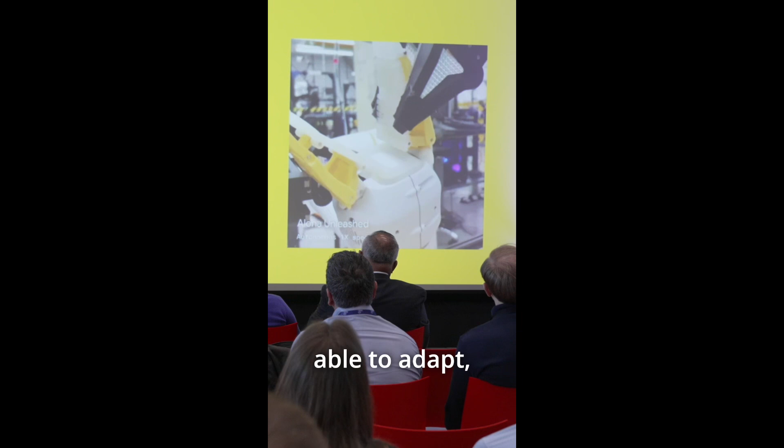And this is actually the moment where I like to announce: AI needs a body, to actually be able to help us humans do things we don't like to do, so we have time to do things we would like to do. So, why is it so important, as I said? We will have robots that will be capable of solving these complex manipulation challenges in the future. They will be able to adapt, but they will also be able to handle things that they have never seen before. So this is what you can expect from the new ones.

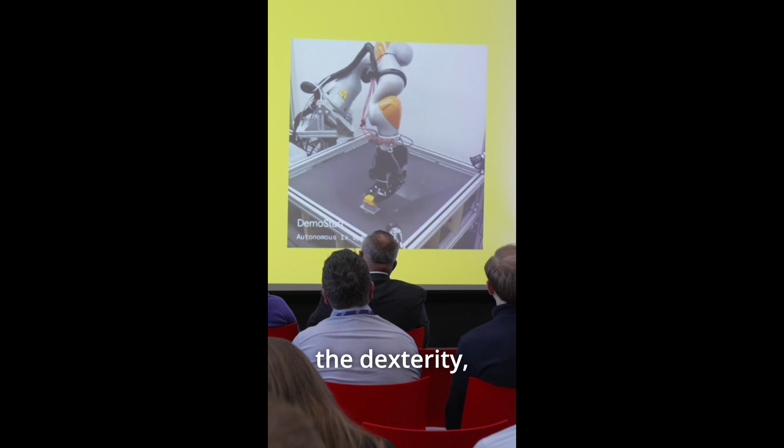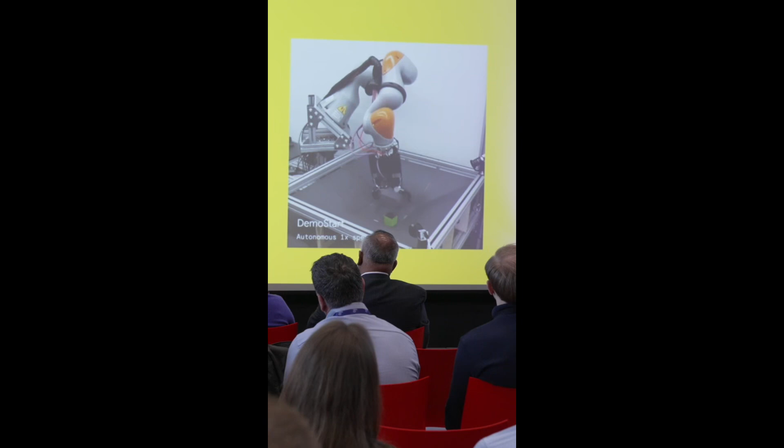So this is the DemoStart, the second one. I told you about the dexterity, how the robot is learning to put different stuff, autonomously, obviously. With the Shadow gripper, yeah. As you can see, we still have a long way to go, but it's a good start.

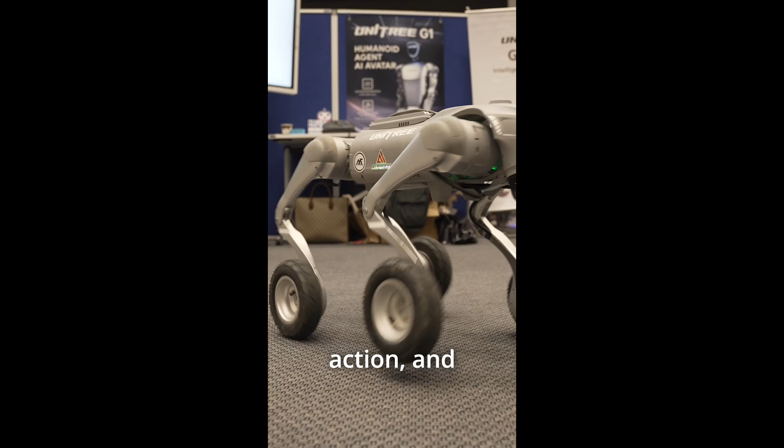I'm very careful in declaring the next industrial revolution, but for the first time in my life, I feel it's worth thinking about announcing that the fifth industrial revolution is coming. Dear participants, to truly step forward to an Industry 5.0, we need a vision that goes beyond a two-year ROI. We need to take action. Humanoids and other deep technologies are not just a tool to improve this or that process. They will be essential components of our future society. The race for physical AI has just begun. Switzerland and also Europe must play a role in this race.

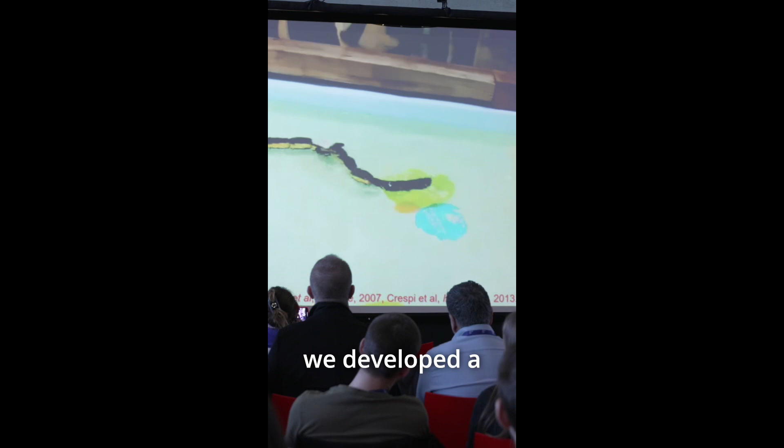What we did in the past is make a robot inspired by the salamander, that can swim and walk. Together with neuroscientists, we developed a spinal cord model of the salamander. And what is interesting is that with just descending modulation signals, we could completely modulate the type of locomotion, swimming or walking, steering, and also the speed control. This is really thanks to this system of coupled oscillators, which we have on board the robot.

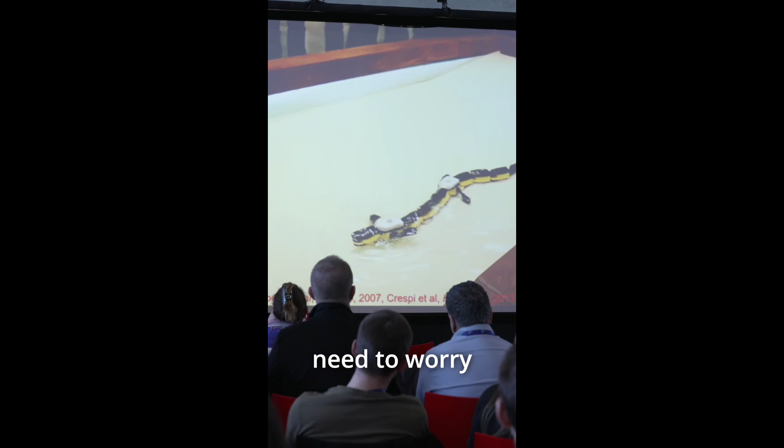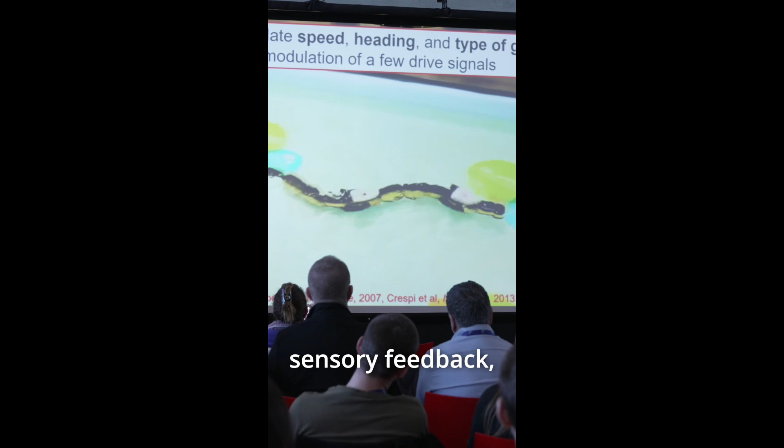I think that's one of the beauties of this low-level control: the high-level control doesn't need to worry about all the actuators. It mainly worries about higher-level signals like steering and heading. And interestingly, this was done in open loop. There was no sensory feedback, and the only input was from a remote control by a human operator, highlighting that in principle, such an animal could be mainly CPG driven.

First, we probably need to be careful about promises and expectations. We need to understand the limitations of the current technology and should not overpromise. That is the first message. But the second message is we should also be very ambitious, as David says, because technology and science do not progress linearly. They generally progress non-linearly, and we see step changes. And we know that it's possible to have these intelligent robots at some point. And for that, we need to push forward. So those are the two messages.

Thank you. How do you envision the future of AI, robotics, and humans for our audience? If it was one thing, what is it for you, André? I think it will be the seamless integration of all these different systems. We've been talking about AI, about robots, about the human perspective. So if we look forward from an industrial perspective, very much will be about the seamless integration of all these different kinds of systems, cognitive and so on, and therefore really enabling this level of flexibility, dexterity, and of course hopefully improved efficiency.

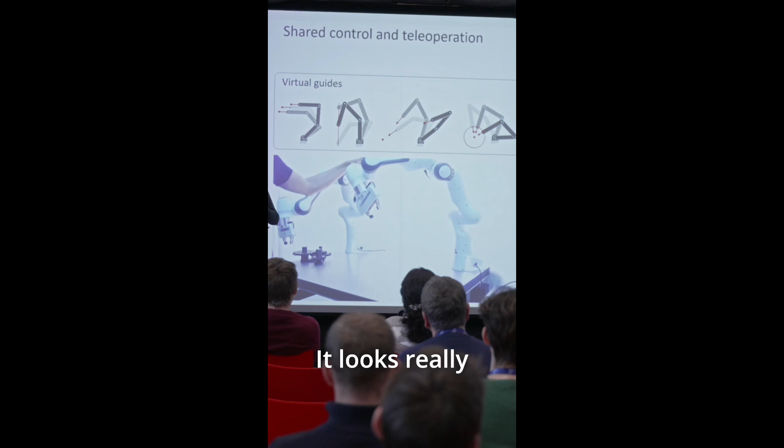So when we think about a robot, one of the challenges is to transfer the skill to the machine, but another challenge is to have the two working together at the same time. And this is what I wanted to illustrate in this slide. Here we have a robot that is compensating for the gravity. So we have a robot that looks as if there is no weight. So when we move it, we don't have the impression that there are motors. It looks really like something extremely lightweight to move.

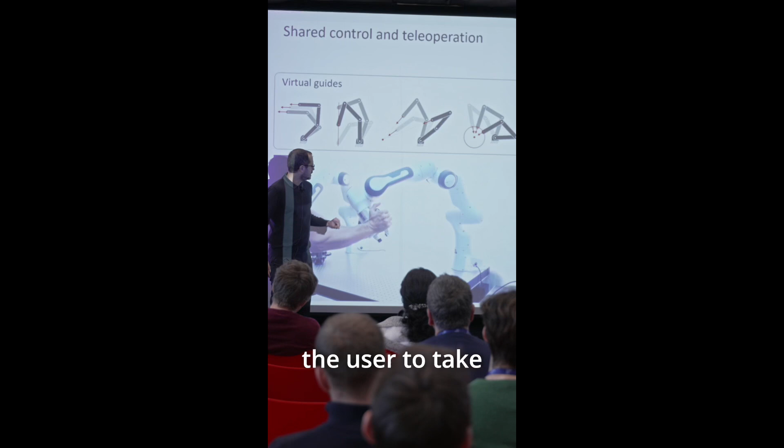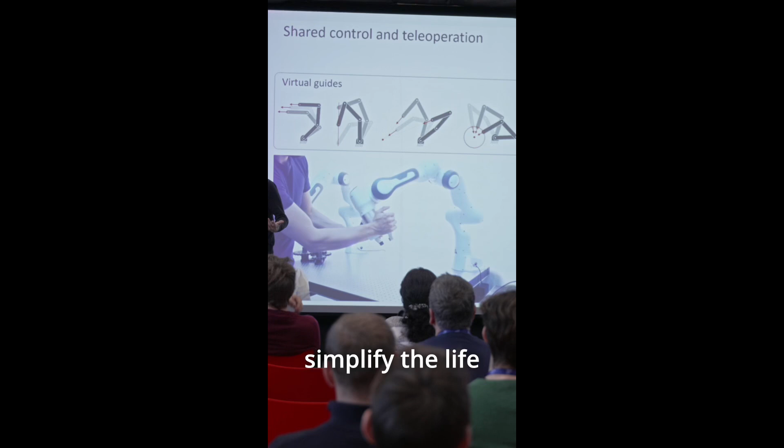And here what we added is a mechanism so that the robot would point at the object of interest without having the user take care of this aspect. So we have in this way a collaboration where this can typically hold a tool, and the tool can potentially be quite heavy. And the robot is here as a way to simplify the life of the operator, because the operator doesn't need to care about some of the aspects that it needs to control.

Scientists, right? We look into the data, we see that many things are converging. We love to always say 2030, 2045, 2050, because they're nice rounded numbers. But definitely, at least what the facts and figures are saying, computer vision is improving, sensors are improving, different kinds of technologies that are key for making humanoids more ready for interacting with us and with the environment where we work and live are starting to converge.

So hopefully in the next maybe 10-15 years, we're definitely going to see something that will satisfy our expectations, right? Which is another big debate: what is a good humanoid robot and what is not?

Thank you, Dave. One of the biggest challenges is, first of all, to get the data in the first place. Because as I mentioned in my presentation, collecting data is one of the most expensive pieces in the picture. And also, you need a lot of human developers, and a lot of engineering hours go into it. So having a mode of synthetically generating the data, the motion, and getting the robot trained on that front, I think that is one of the biggest challenges.